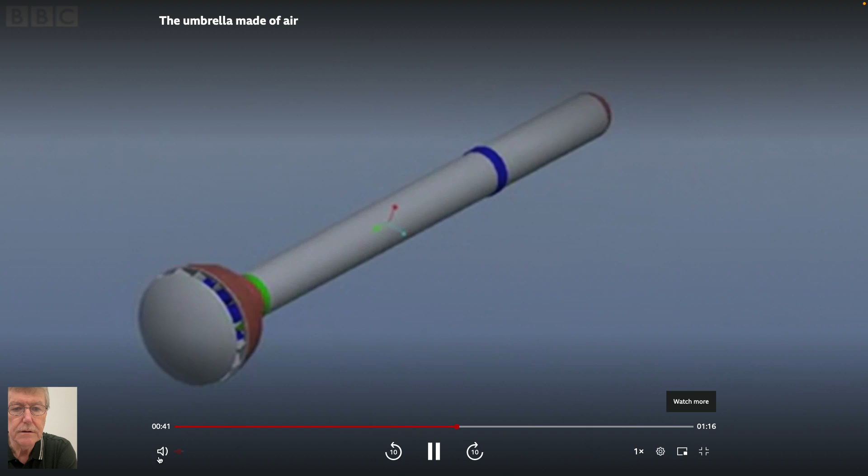An umbrella that doesn't rely on traditional materials to keep you dry, but instead creates a force of air so strong it actually deflects the rain away from the area above you.

Well, I've never seen one of those umbrellas actually in use. That's kind of cool. I guess it's a bit antisocial because it probably blows all the water on someone else.

And so, what else have we got? Oh yes, bit of death.

Northern California, a giant fireball there last night, just around dinner time. Dozens of homes destroyed after a huge explosion last night. It was apparently caused by a broken gas line. It happened in a San Francisco suburb very close to San Francisco International Airport.

The firefighters are still working to make sure all the smoldering flames are out completely. We're seeing little pockets of flames still pop up here after a raging inferno around dinner time Thursday evening. Flames roared some 60 feet into the air as block after block in this residential neighborhood, about 5 miles from San Francisco's airport, were engulfed. Witnesses reported hearing and feeling a large explosion, leading to early speculation that a plane may have gone down. It sounded like a jet, almost like just a giant roar, and then the biggest boom I've ever heard in my life. But it was a hot...

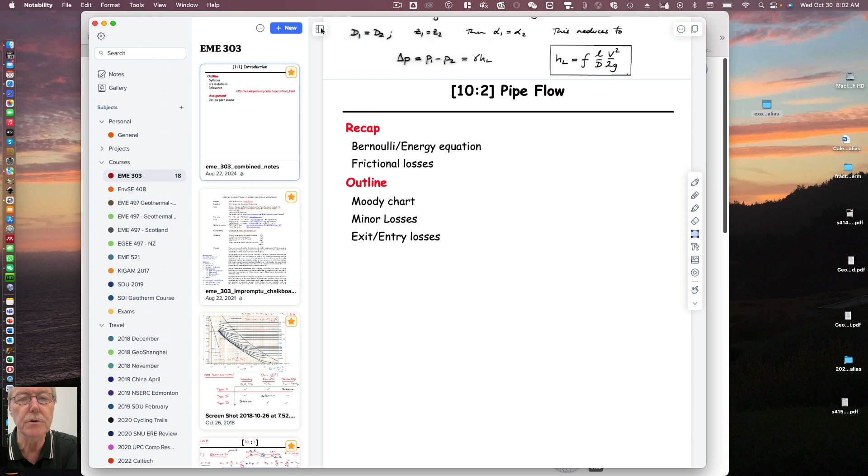So anyway, that kind of brings us up to pipelines. We tend to think about pipes in our house, but of course pipelines are used for all kinds of things. Well bores for getting water out of the ground, and for getting natural gas and hydrocarbons out of the ground are also pipes of some nature as well. So that's what we're busying ourselves with now.

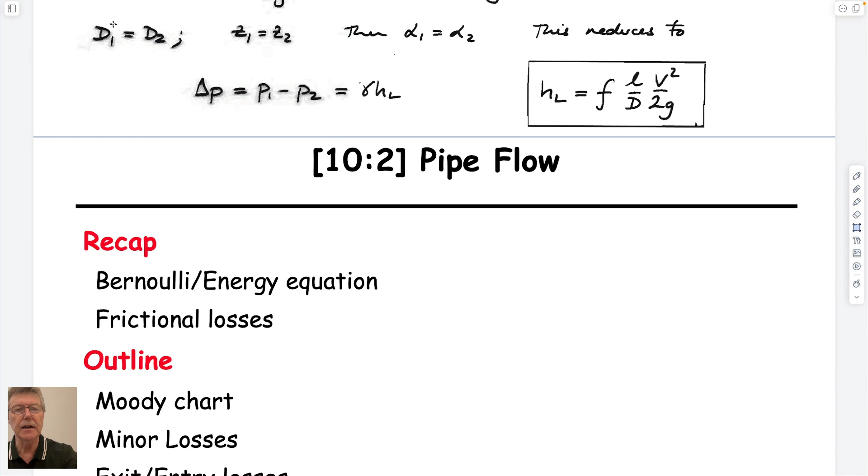So what did we talk about last time? We tried to motivate the idea, I'll go back maybe to drawing things again today. We made the point yesterday of kind of what we've come through. We talked about Bernoulli, and we've talked about the energy equation, and the only difference between them is that if we use the energy equation, it allows us to realistically accommodate losses in our system.

So I'll get back to drawing things. And we talked last time about how we can characterize these flow systems. I guess we could do it in terms of what we know about this. This is just a simple geometry that we have.

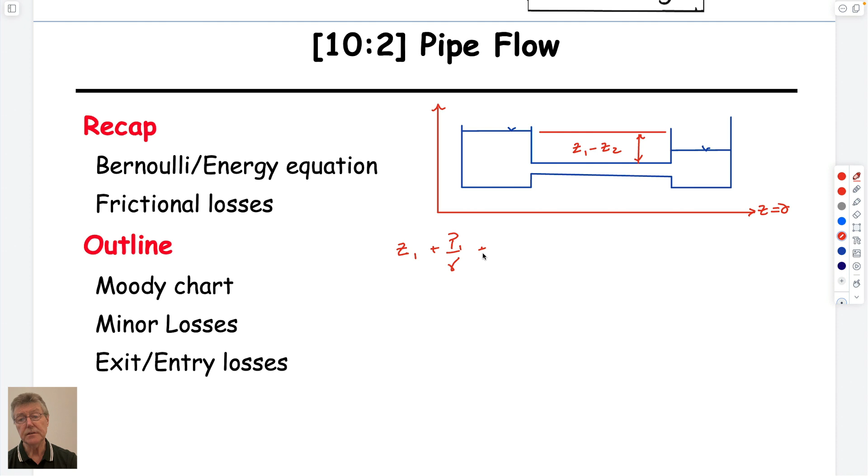Relative to our datum, z equals 0 here, and z going upwards. And we've talked about Bernoulli. This would be z1 minus z2, delta z. So you'll remember that our Bernoulli equation is elevation plus pressure head plus velocity head plus pump head, and that is equal to the converse on the other side, which you also know, probably don't have to say.

And added to these are two other terms: the sum of head losses plus the sum of head losses. And these we'll call major, and these we'll call minor. So if we remind ourselves of this, you know all these features, I think. This always has to be upstream, and correspondingly, this has to be downstream.

Pump head we define as equal to the power output, we'll call W dot, divided by density times flow rate times G, gravity. I guess we've also called it other things, such as Q rho is the mass flow rate, right? We called it uppercase M, and G would be one way to write it. We know if it's positive, it's a pump. If it's negative, it's a turbine taking energy out of the system. So that's our sign convention for these.

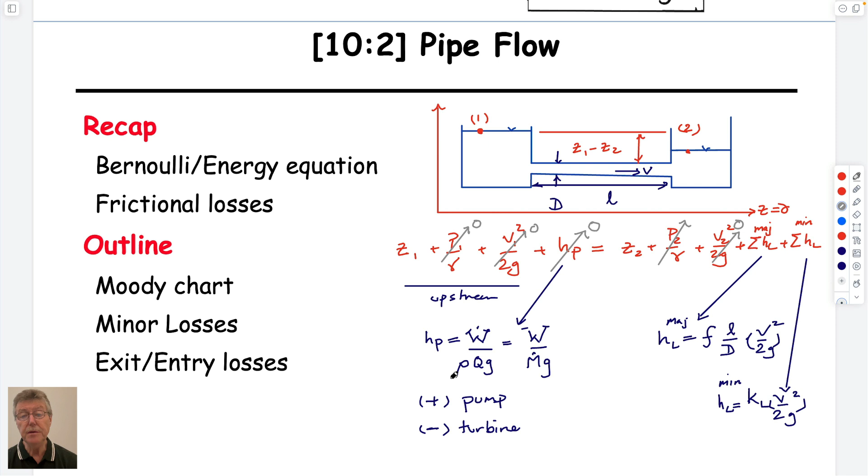So you'd be left with just an expression here that you want to solve, which would be Z1 minus Z2 is equal to HL, and there's only one HL, so it's equal to the friction factor times the length over diameter times V squared over 2G. V squared wouldn't be 0 because of the velocity in the pipe.

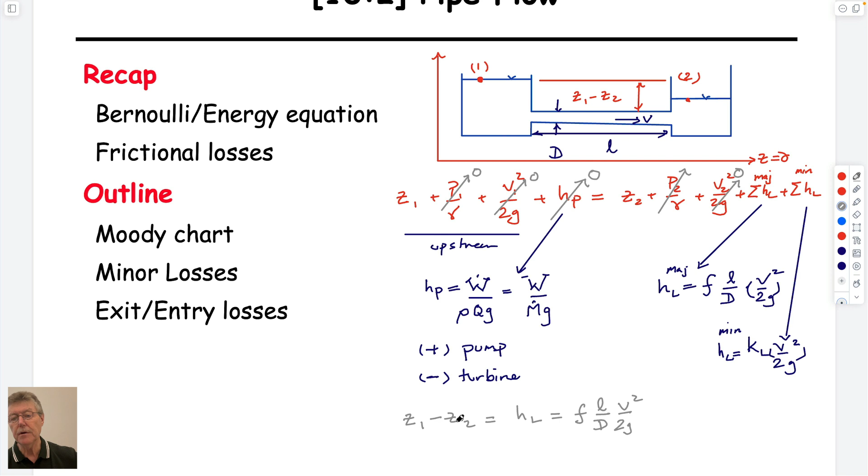Notably, you could see that if this was Bernoulli and there was no head losses in the system, you couldn't sustain this, right? Because it would give you Z1 minus Z2 is equal to 0, and that's not true. So the whole essence of this problem is the frictional losses you incur in the pipe.

The alternative way to do it, that would be one way to do it. A second way to do it would be to write it with points, instead of points 1 and 2, maybe with points 3 and 4. And 3 and 4 could be here.

And I guess if that's the case, I can erase these straightforwardly. This would no longer be 0. This would no longer be 0. But this would, because they're on the same elevation, right? It's not 0, but they cancel out. 3 and 4 are on the same elevation, so we lose these.

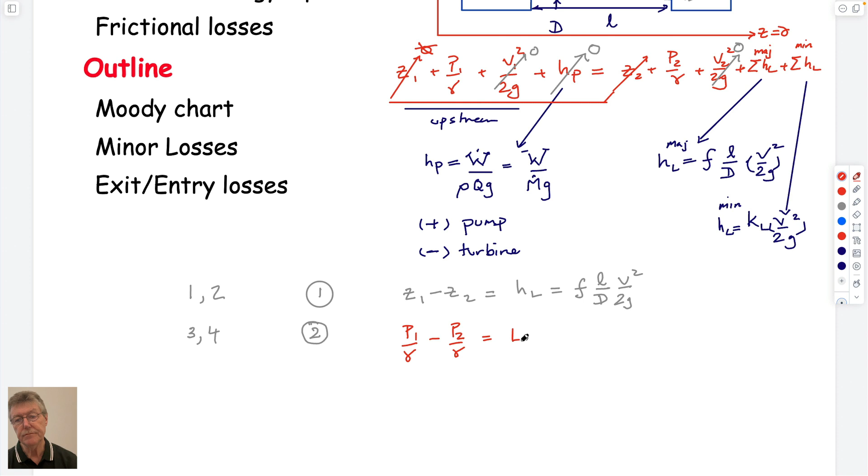I guess in our way of drawing it, I'd have done it like this, right? Not 0. They're equal to each other. And so if that's the case, then we have P1 over gamma minus P2 over gamma is equal to HL.

And of course, the pressure here is just going to be equal to whatever this height would be. Well, the upstream pressure is going to be this, which is just P3. And so P3 is equal to H, I don't want to call it Z, right, is H3 gamma W.

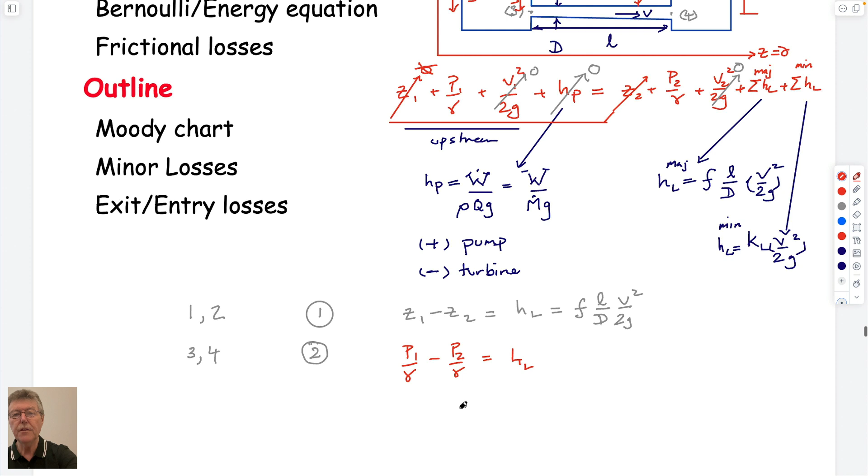So either way we do it, the velocities cancel out if the pipe is the same diameter along its length. And so we just need to figure out exactly how to work out these characteristics.

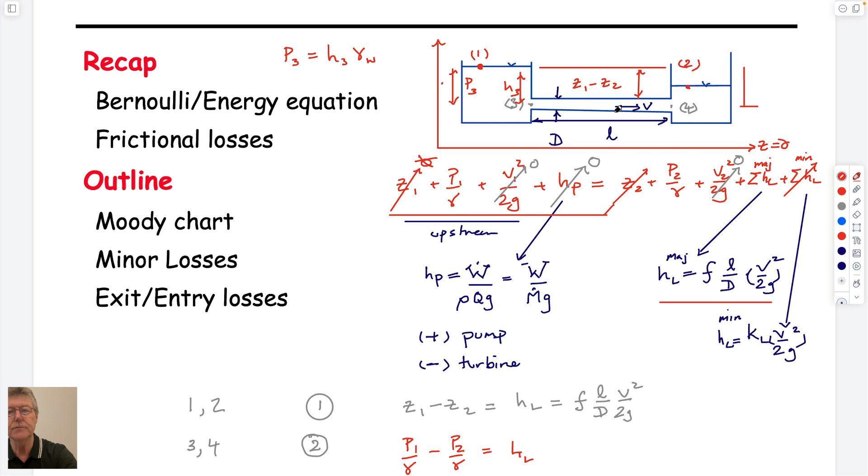For equation 1, how come we don't include the minor losses? Can't, because I don't want to. Let's not complicate matters. They're minor, so we don't want to. So for what we'll do today, we'll concentrate on minor losses maybe next time, but we'll talk about, these are probably the major components of losses, hence they're small incrementally, but they're major because they act over long length. So just forget about it for now.

And so what we could do is we can then hark back to what we talked about last time. And so hopefully you've still got 15 hours to look at 9.3. But remember last time we used Buckingham pi.

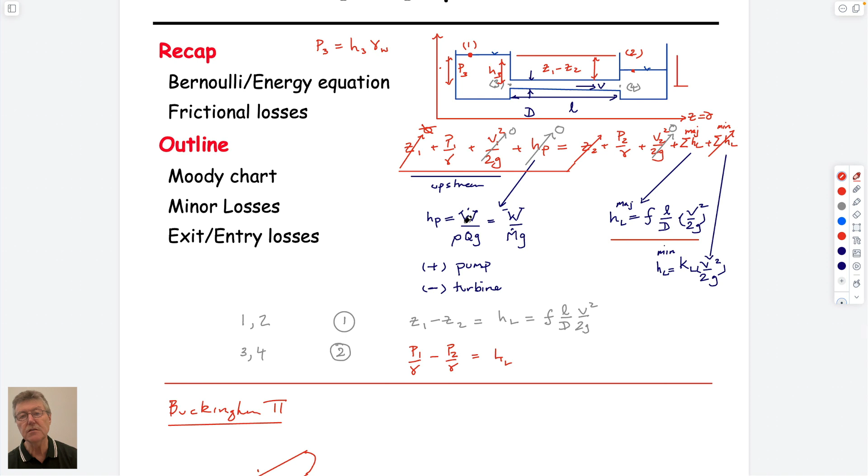We described our system in terms of flow in a pipe, which is what we're doing. I guess I'm making the point that we could pull this pipe out on its own, just like this, and we could just look at the pressures upstream and downstream.

So this would be what we call dP, I guess, on Monday. We could look at the length of the pipe. We could look at its diameter. We could look at the fact that fluid is coming out of it at some average velocity.

I'm not sure we made the point last time, but if we looked at a section across this, the actual flow section will look like this in terms of velocities. But what we typically do is we take this and we transform it to be a uniform velocity, that is this. And so in that particular case, the area under the curve on this parabolic distribution is equal to this.

So this is the velocity. I suppose this is velocity as a function of radius. This is also. But this velocity here is just an average velocity. So what else did we say? We said that we would have the density of a fluid, we'd have a viscosity of a fluid, we'd have a velocity, I think that was it.

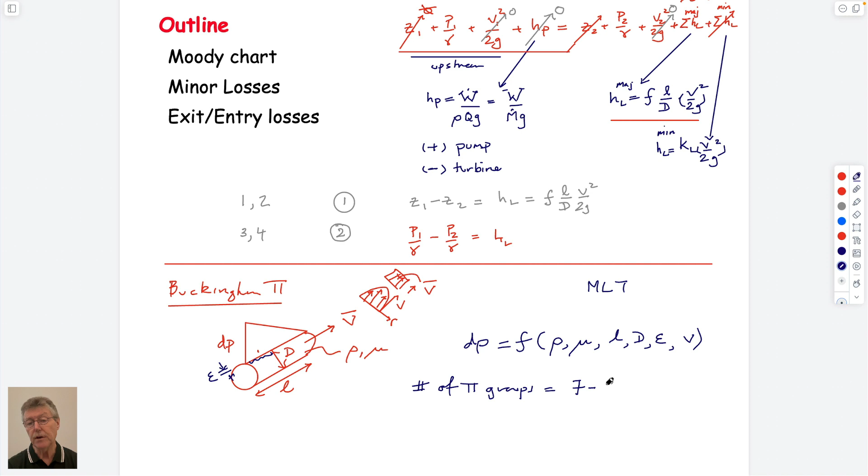So there are 1, 2, 3, 4, 5, 6, 7 terms here. From Buckingham pi, we know that the number of pi groups equals the total number of terms, 7, minus the total number of MLT—mass, length, and time—represented. So certainly mass is represented here, as is length. Time is represented in velocity. So we have all three.

So 7 minus 3 is equal to 4. And we said last time that we could describe this behavior in terms of 4 dimensionless groups. We can take care of 3 of them by noting that these are all in dimensions of length, and so we could just combine 2 of these as Buckingham pi groups. You'll always get dimensionless groups, but you don't necessarily get the ones you want that guarantee you can use them usefully. So it helps to know what those are in advance.

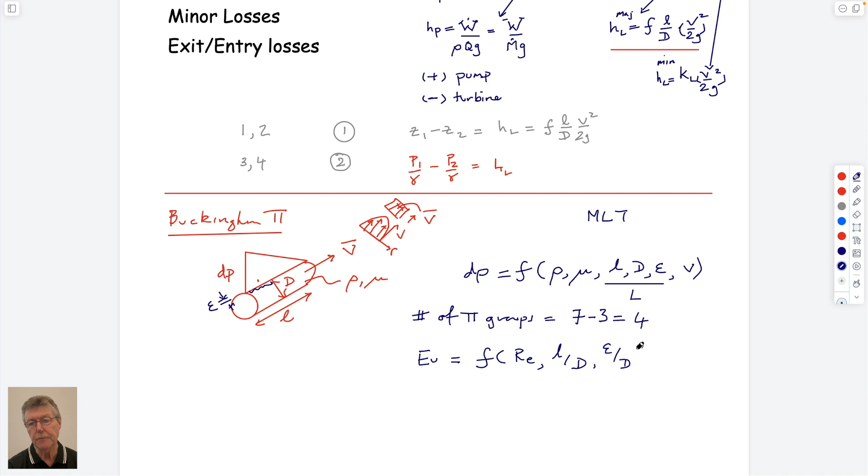So if we use these, we end up with dimensionless groups, and that is that an Euler number is equal to some function of a Reynolds number, length over diameter, and roughness over diameter. So we know there are 4 groups. We can combine them in some way, and if we did it in a smart way, we'd end up with this.

If we want to write this out in longhand, we'd end up with an Euler number, which is a pressure—which we've called change in pressure—divided by rho v squared. Remember, with dimensional analysis, geometric similitude, the model has to look like the plane when it's shrunk down. Kinematic similitude has to satisfy the Reynolds number, and the Reynolds number is going to be something like a velocity, a density, a characteristic dimension, and a viscosity.

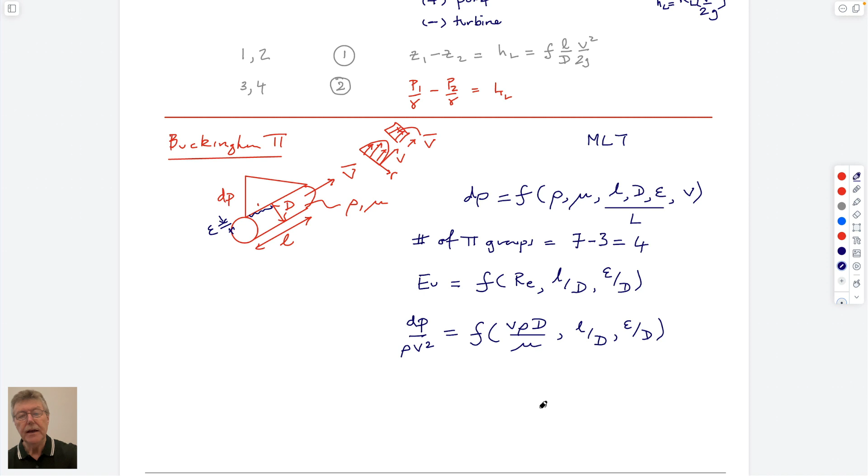And these 2 other terms, L over D and relative roughness. So what we could do is, if we think these relate to each other, take a pipe that has a given length and diameter, and let's say the roughness is 0, then we could do an experiment on that pipe. And if we then plotted from that experiment these 2 remaining variables, the pipe doesn't change, the roughness doesn't change—it's just a single pipe.

And so we do an experiment flowing fluid along here under a particular pressure gradient between upstream and downstream, and we measure the velocity, the average velocity. So if we did that, we could plot pressure over rho v squared, which is the Euler number, against the Reynolds number, which is the velocity, the density, the diameter of the pipe, and the viscosity of the fluid. If we're only using one fluid, then the densities and viscosities will be the same.

And so if we do that at a given pressure, we'd get a velocity. So pressure dP1 gives us V1. And that would give us a point which we could plot on this graph, which would be this. Very simply, we get this.

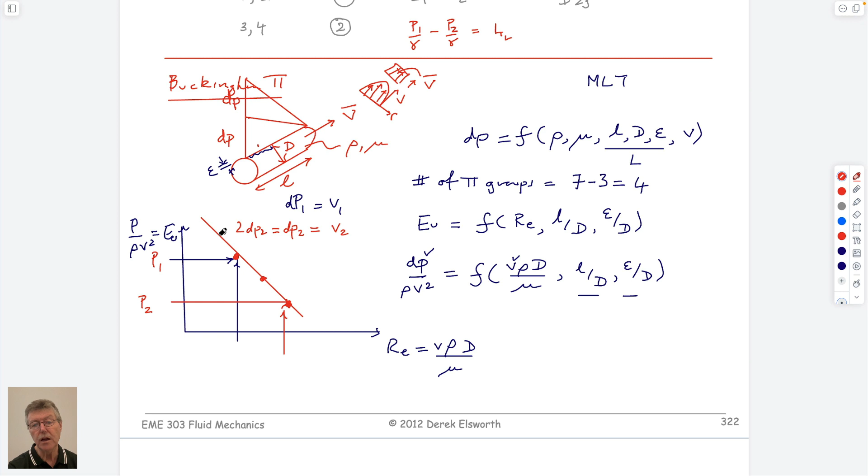But if you've doubled the pressure, then this number would have increased, and so you'd have a point that would be here. And so now, if you want to do other experiments, you'd expect all those other experiments to just go on those lines if you change the pressure. If you increase the pressure some more, maybe you'd be down here, and you've got a relationship. And so this starts to look like the behavior that we'd expect.

And so we can characterize the behavior in terms of this. And actually, this is exactly what we expect to see. The so-called Moody chart is that this curve here is just from doing the experiment at one pressure drop, doubling the pressure drop, tripling the pressure drop, and you just move down.

So without knowing anything about your system, for a particular pipe in a particular flow regime, low enough Reynolds number, you can get that experimentally. You could also come back here and keep on doing that. So you could do it at P4 is equal to 4 dP1, say.

And you might expect that this keeps on going, but actually what you'd find is that it starts scooting over here. So it'll come down here, and you get a change in behavior. And you see that in the Moody curves that we just looked at. So if you keep on doing it to get P3 and P4, then you don't get this linear relationship anymore.

You don't know that yet, but we'll explore why that might be. But you come along this, and this occurs at a break in the behavior. And typically this is at a Reynolds number of something like 2,200, of that order.

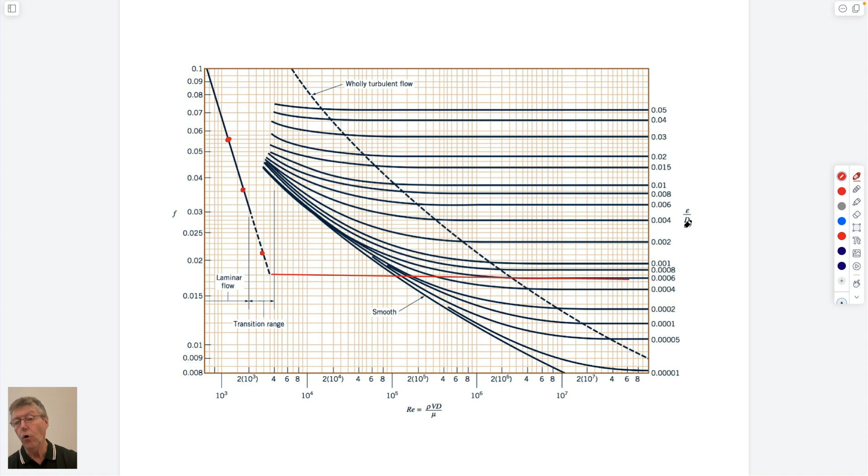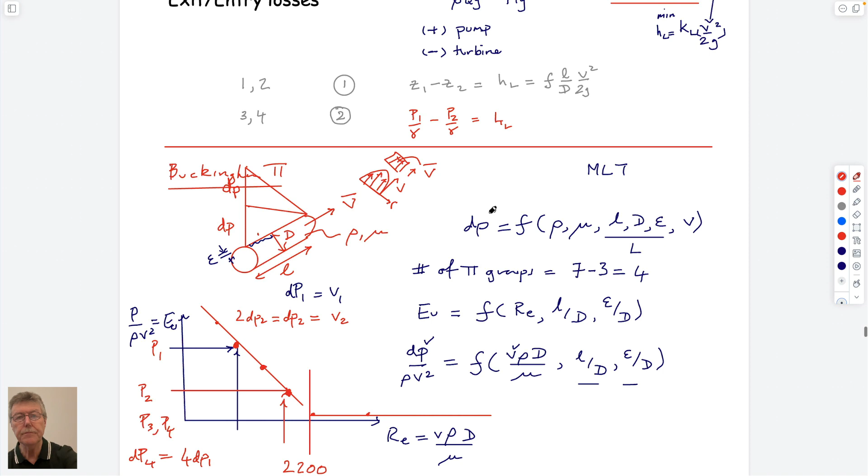And you see that now this Euler number, which is this thing here, the Euler number is also what we call this friction factor. You realize that this number here, this friction factor, is actually our Euler number.

It's the amount of pressure that's eaten up in pushing fluid along a pipe. So if you're pushing fluid along a pipe, it starts off at high pressure here, comes out at low pressure. So this pressure is eaten up, in this case, because there's a drag along the sides of the pipe. It's just a shear force due to the viscosity.

If it's a closed pipe and the fluid's hitting the wall and going around it, it's just the same thing. Pressure is high on the front end of the pipe, it's low on the back, and so there's a net force on the pipe. It's just from flow around the pipe in that particular case. But it's the same basic relationship.

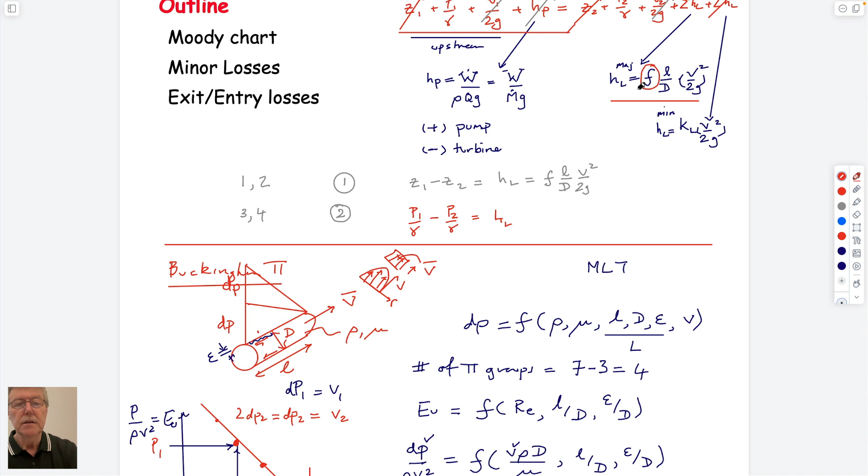And so that's the kind of behavior we have. So we'd like to be able to understand a little bit about how we get these relationships. So the other thing we could do, this all experimentally, which is what we've done here, or we could be a bit more flash about it, and we could do it analytically, I suppose.

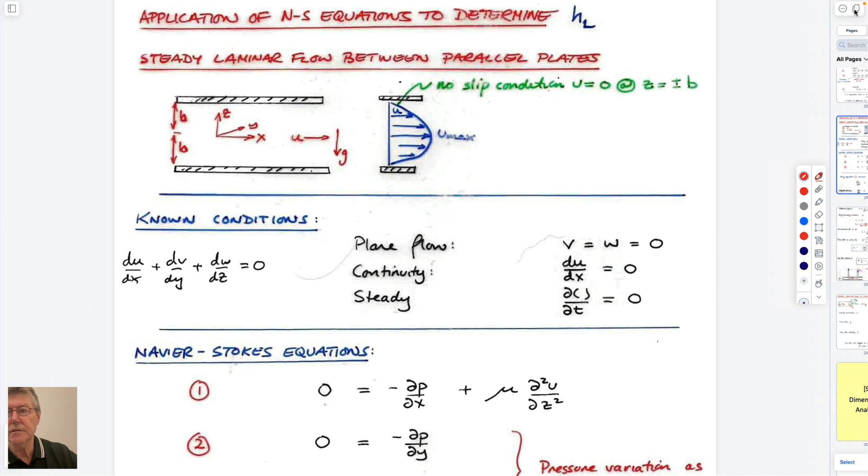And if I go back to something I think you've seen already, I need to keep the pen away from this. So in week 8, it should be right here. I don't know how much time we spent doing this, but can't remember whether we talked about this this year or not.

You'll remember, also relevant to this course, but not really examinable material, that we had conservation of mass, which we wrote as being, in this particular case, sum of mass flow rates are equal to 0 if we ignore the other terms.

And we have conservation of momentum, I'll write it in shorthand, mv. You'll remember that was a velocity multiplied by a mass flow rate. You used it on your test last Friday, is equal to a force. You'll remember that these are velocity as a vector, so there are 3 equations here.

One in x, one in y, and one in z, and just one for this. If you take each of these equations for a control volume, and write those equations for a control volume that is a little differential element in our coordinate system, so x, y, and z.

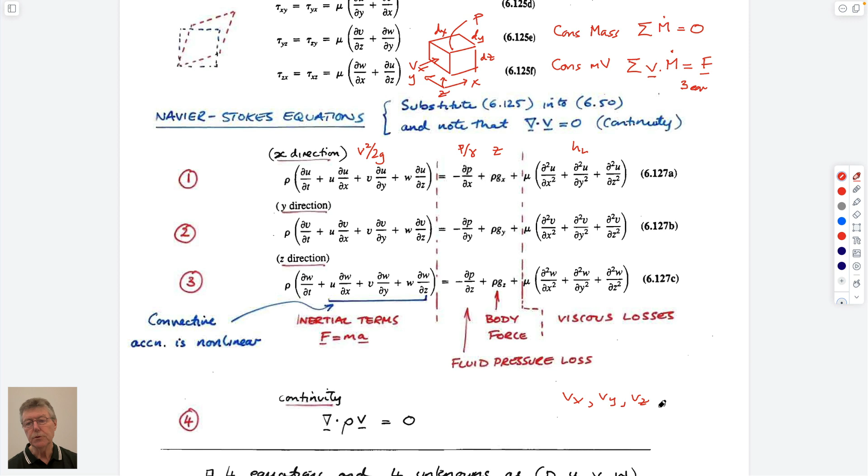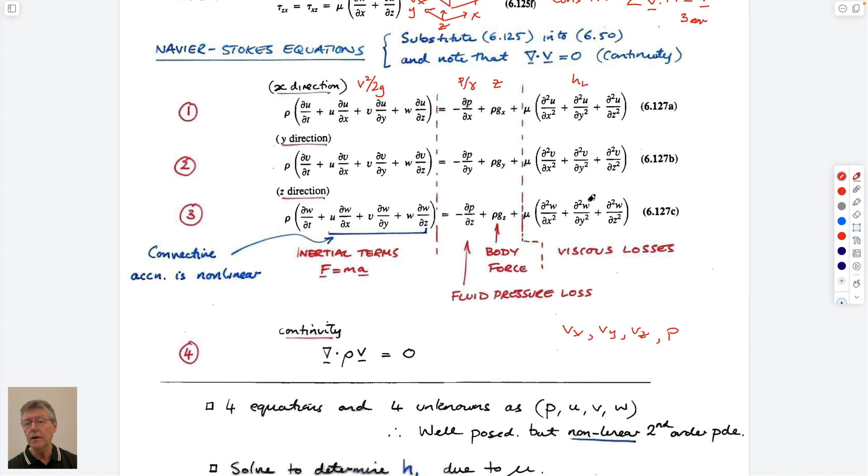So if we want to solve a flow system that involves these, we have to have a total of 4 equations to solve them. So we have 3 conservation of momentum equations and a conservation of mass equation. This is just a different way of writing it.

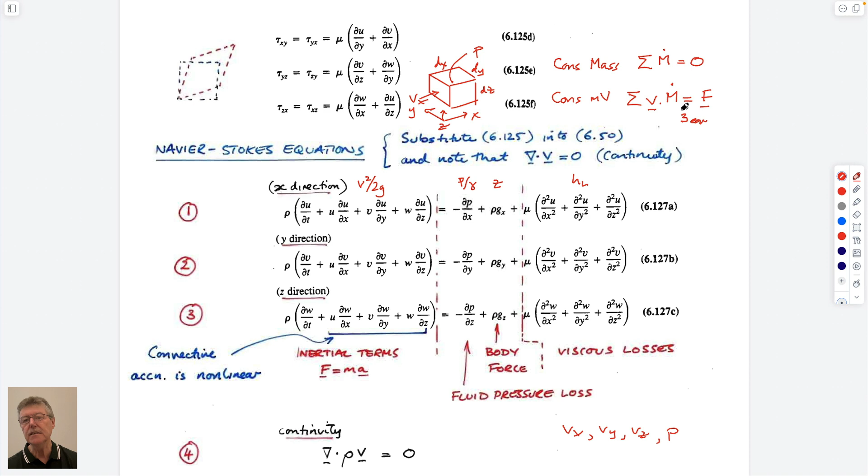So it's basically these equations. This equation, of course, has to have a head loss term in it, so it's not really conservation of momentum. It's actually the conservation of energy term, which we dealt with in week 8, but it's very similar. And so we can solve these equations.

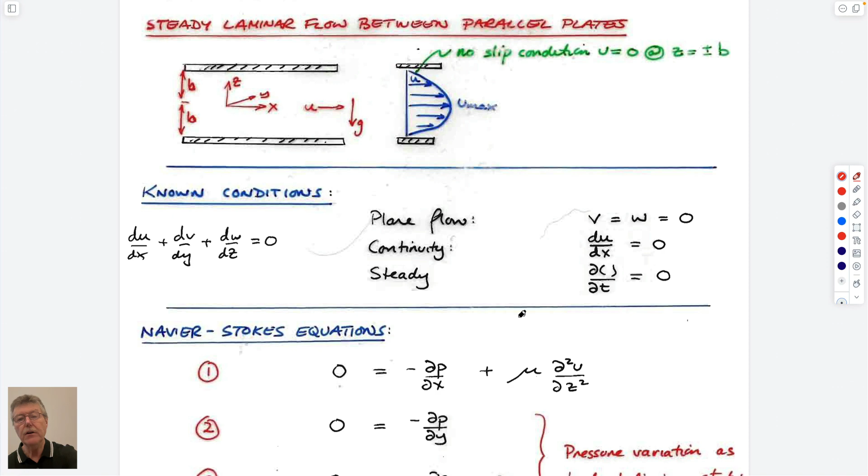If you solve these equations for some seemingly esoteric problems like flow between 2 parallel plates, which is like flow in a duct, you get a distribution of the pressure across the duct and a very simple relationship. I won't go through the derivation, but it says that the average flow velocity is equal to 2 times the half thickness of the duct squared, times the pressure drop, divided by 12 times the viscosity.

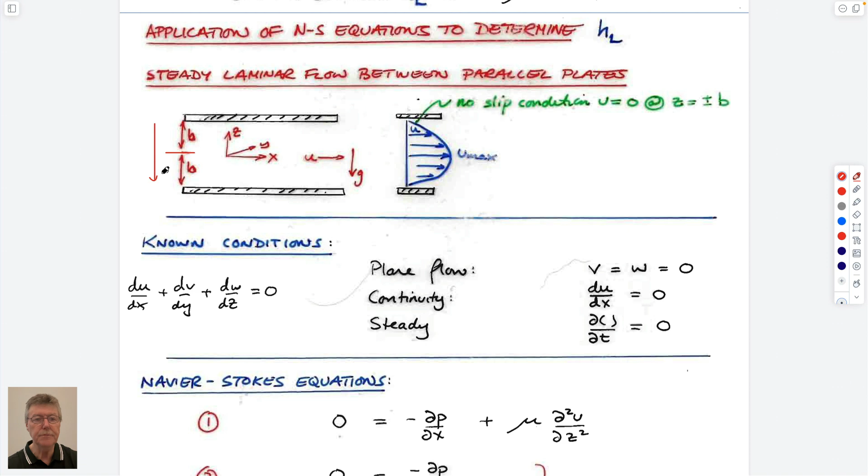And so the geometry of this is given here, so that this is the duct. This is the width across it, and you get the average velocity coming out of this.

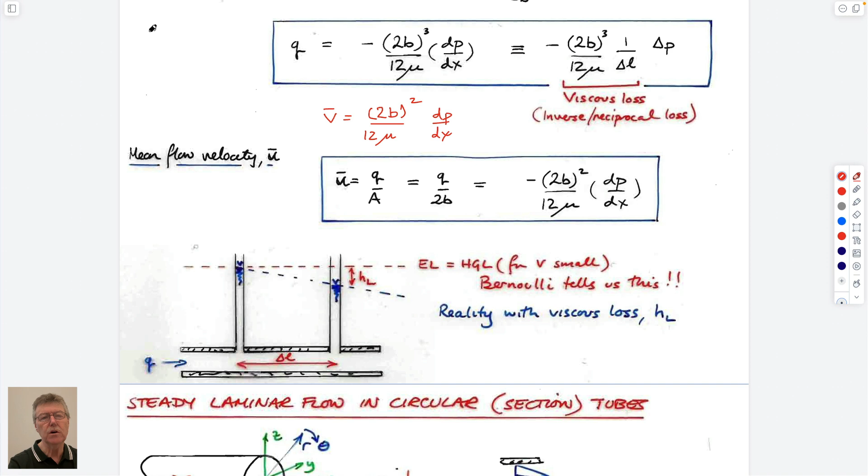It's not completely esoteric. If you're petroleum engineers or environmental systems engineers and you know what Darcy's law is, it gives the flow velocity in a porous medium as a function of a permeability, a viscosity, and a pressure gradient.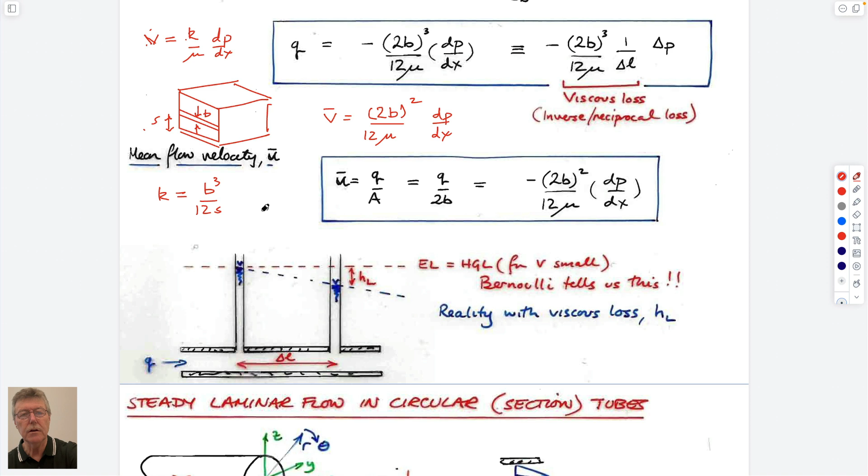So not completely esoteric. You could use this to calculate permeability of a gas shale reservoir or a fractured reservoir that you're containing your radioactive wastes in.

Likewise, you can use those equations to get magnitudes for flow within a pipe. And the solution for that is this. And again, I'll just write it out. Perhaps I'll write it out here. So in other words, the velocity is equal to this term here.

I'll write it out as the diameter of the pipe squared over 32 times viscosity times the pressure gradient.

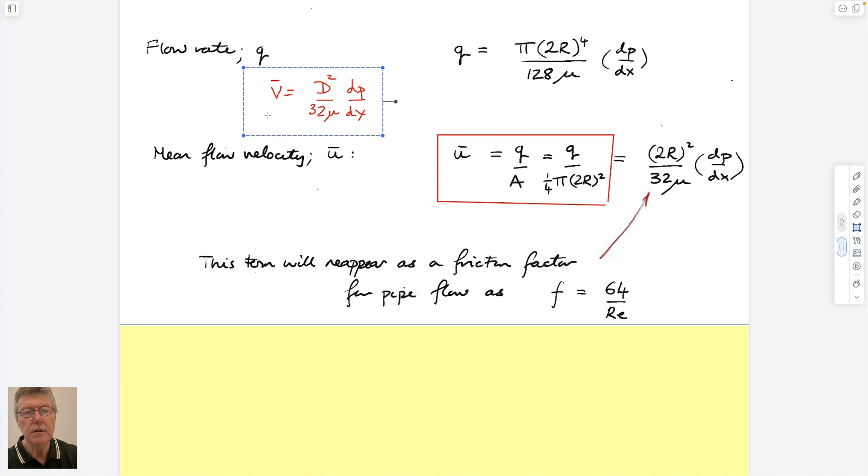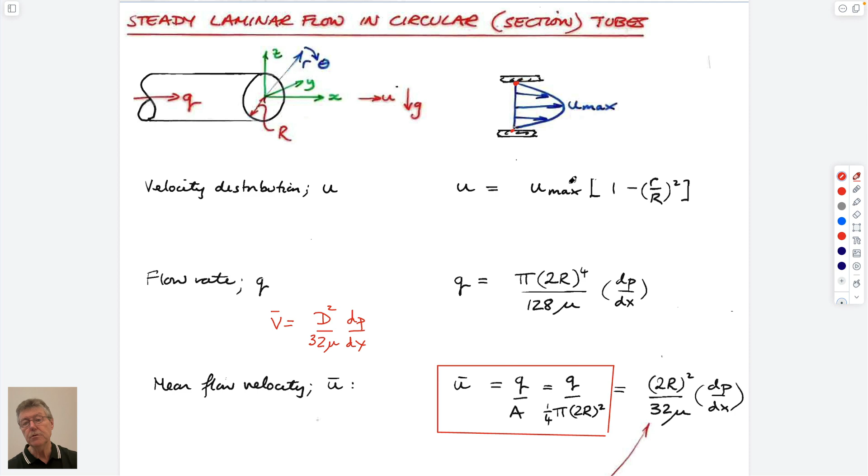And so that merely represents flow within this pipe. We have a velocity profile across the width of the pipe. You'll notice it's anchored at 0 velocity at the walls of the pipe, maximum in the middle. It's actually a parabolic distribution. This is the distribution.

But as I said before, we're interested in the average velocity. So if you take the area of that pipe and reduce it so the areas of these two shapes are the same, then this would be the average velocity here. This is the actual local velocity, it changes across the radius. And this would be the radius. We already drew this.

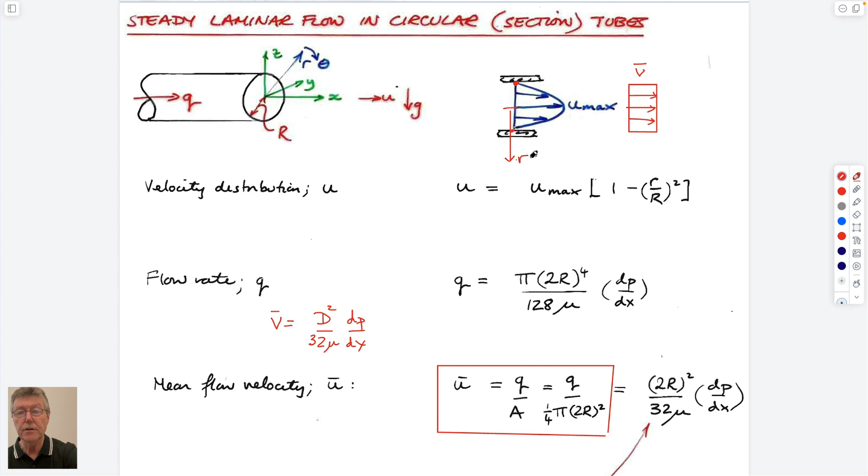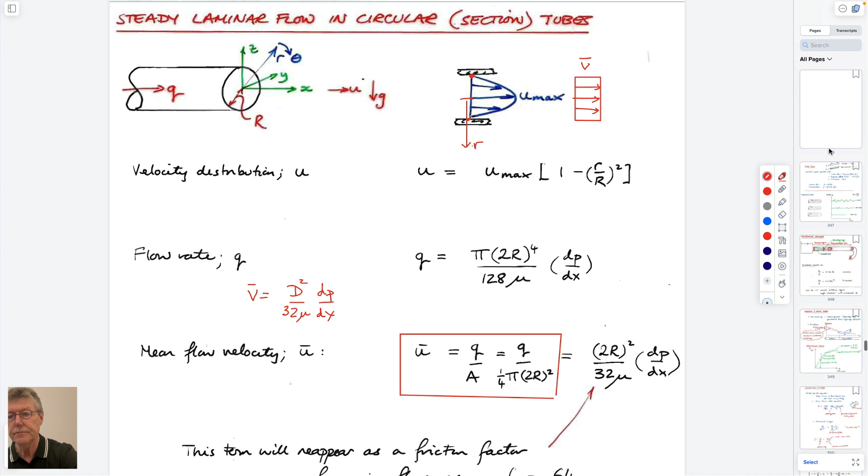Again, I'm getting bogged down in a bit of a rat hole here, but it's fine. Humor me for the moment. So I tried to get back where we were. Bless you. This is probably where we are here. So we're talking about pipes. Let's see if this still works. It might have forgotten already. No, it didn't. Excellent.

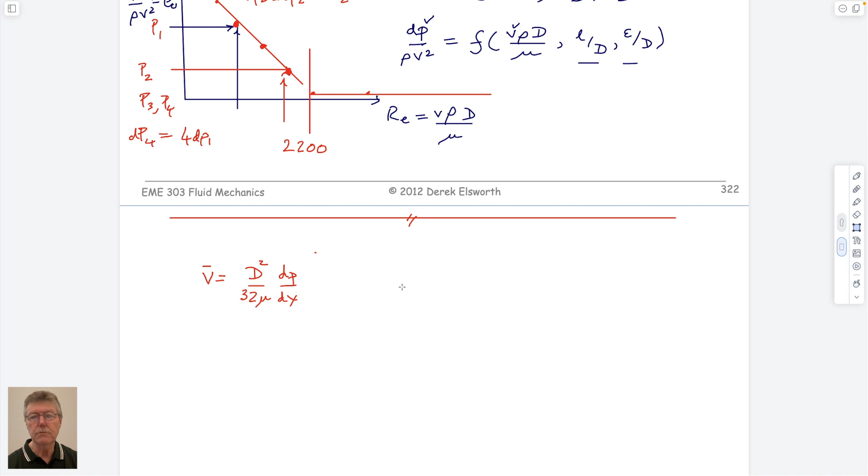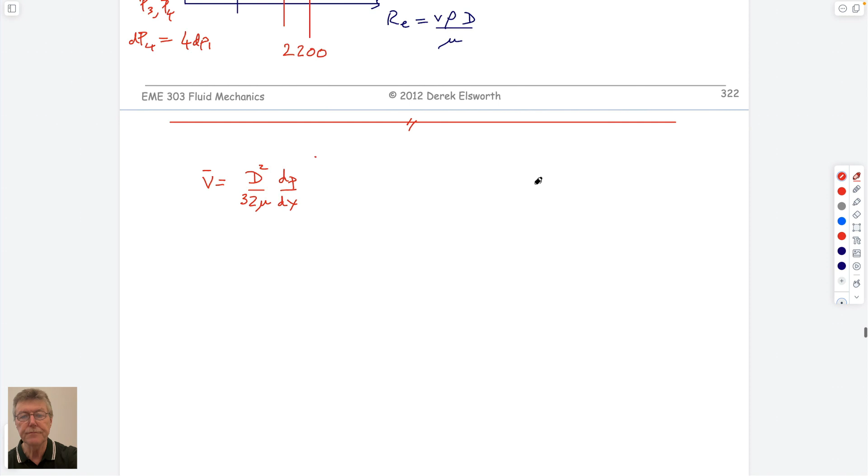Okay, so we want to represent this. What we'd like to do is figure out whether we can get an actual parameter—that's a bad choice of term, isn't it—this should be function of, not that term. Function of. We'd like to figure out exactly what this friction factor is for a pipe. So what am I going to do? This is the average velocity, which is given by that. And so I could write this also for our geometry here.

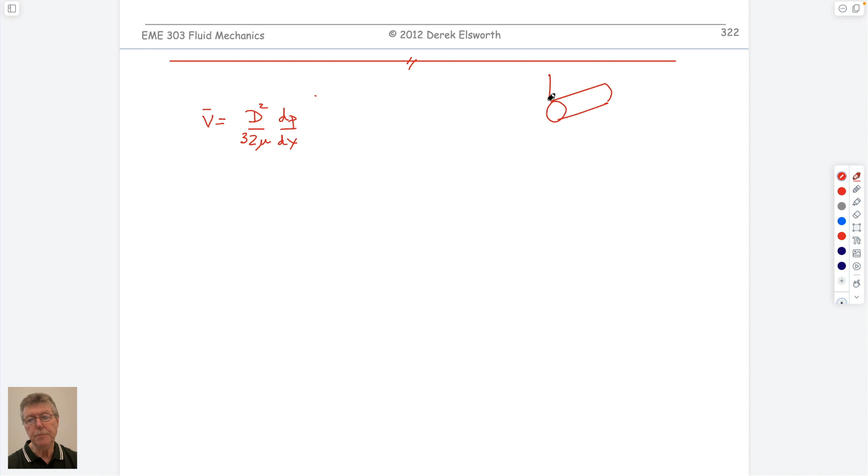This is dP over L, same geometry as before. This is L. So we could write average velocity as equal to diameter of the pipe squared over 32 times the viscosity times the pressure drop, over the length over which it drops, which is L.

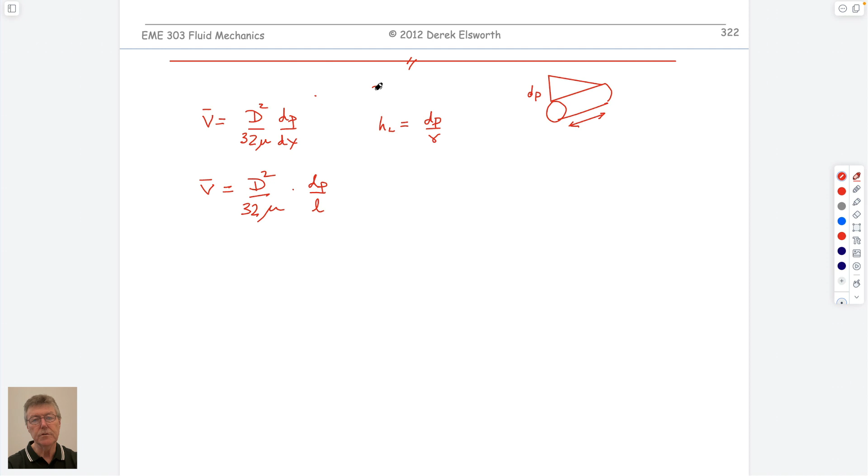And so that is equal to, we know that head loss is equal to dP over gamma, right? In other words, dP is equal to head loss times gamma, just from the relationship. And so we could define this here as that.

And so this would be that the velocity is equal to d squared over 32 mu, head loss times rho g, just to write these terms out, divided by length. And so if I wanted to write that in terms of head loss, I could write head loss is equal to velocity times 32 times viscosity over d squared, times length over rho g.

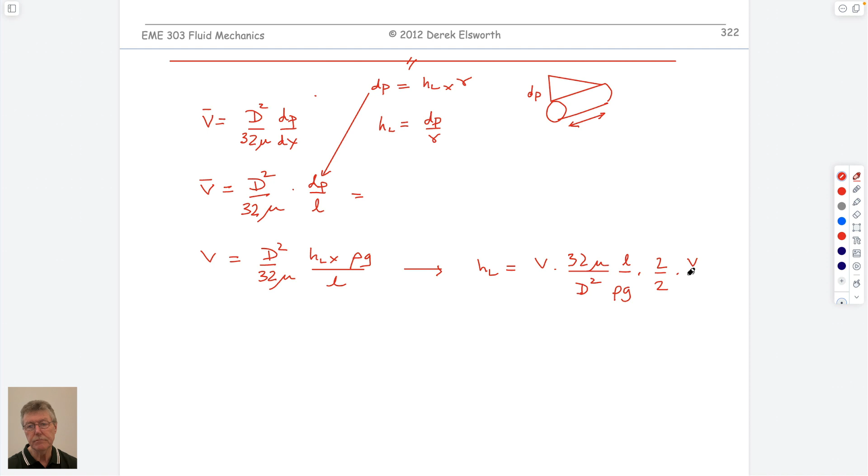And I think I want to multiply that by 2 over 2 and v over v, right? This is just 1. And the reason I want to do that is because now I want to split it up into terms that mean something to us. So if I take this and multiply by this, this is 64.

This is 64. This is L over D. This is V squared. So this and this... did I lose a P somewhere? No, I got rid of it. This is V squared over 2G.

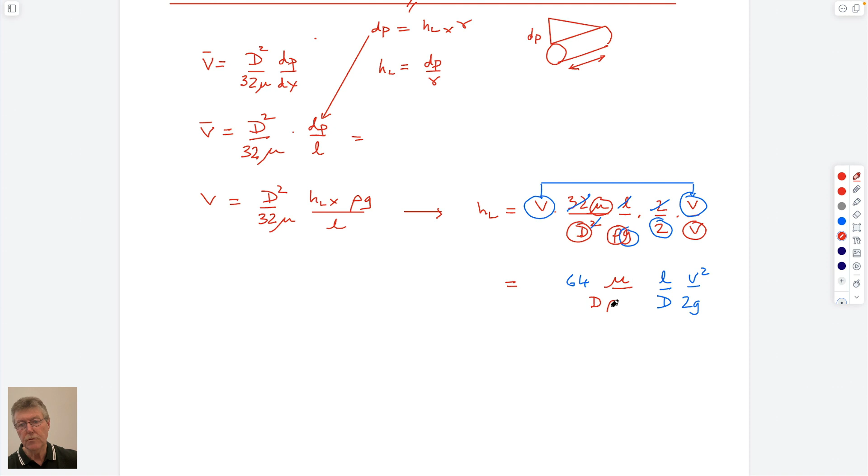And I'm left with, if I use a different color, mu over d rho v. So what we've got exactly here is that this is equal to 64. This term here is Reynolds number, but 1 over. And this is length over diameter. And this is v squared over 2g.

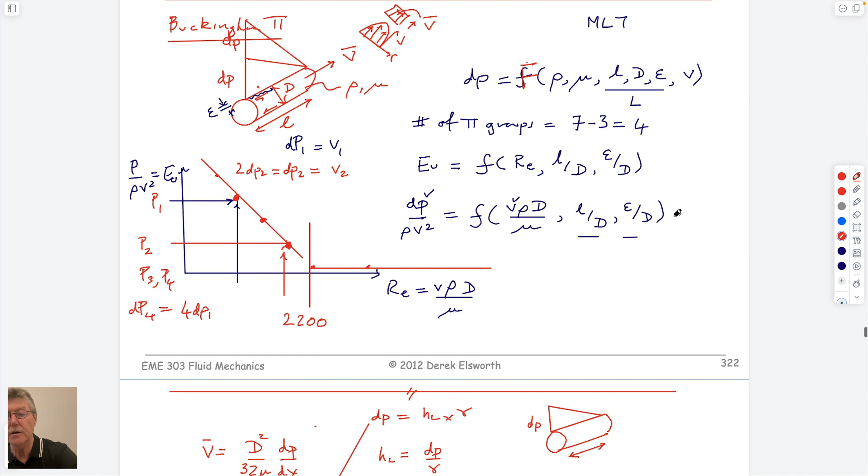So in terms of how we defined this before, I did actually get it out. This is friction factor. This is length over diameter. And this is v squared over 2g. So if you remember, we came into class today just throwing this out, not really explaining where it came from. But that's where it comes from.

And so this is for laminar flow. What we mean by that is that the flow profile across the width of the pipe is this parabolic flow. No vortices, no eddies, but this particular distribution which gives us this. And so this is useful because this friction factor, F, is just equal to 64 over Reynolds number.

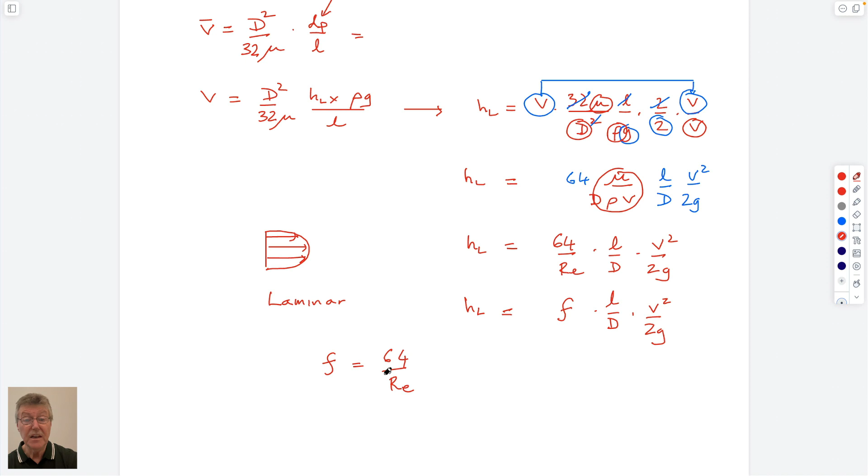And we also said that this friction factor, or perhaps I didn't, is also equal to Eu. And so if we go back to this, this is also equal to our friction factor. So I'm just trying to make sense of where all this comes from. You don't need to know those derivations, but it's perhaps useful to understand where it comes from. So we could do experiments, and Buckingham Pi allows us to choose groupings of variables that allow us to do the minimum number of experiments.

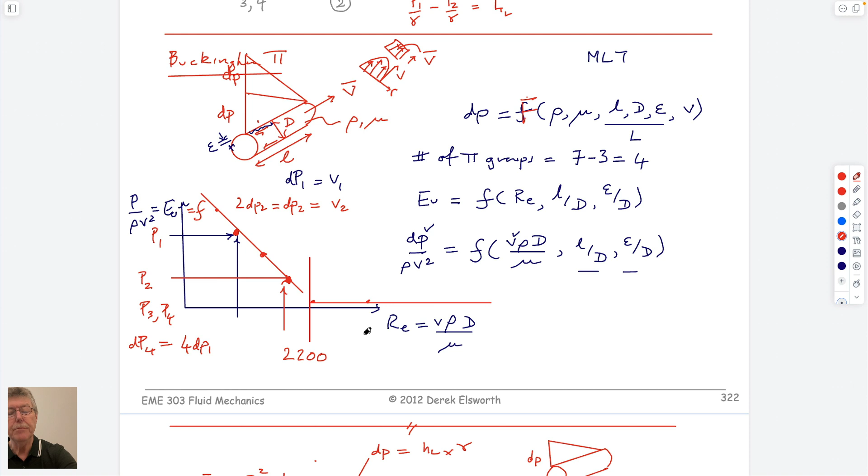So we just do them with a single pipe and change the pressure, and we know that's fine. We could also exchange the pipe out for one that has different roughnesses, and we'd get different behaviors, and construct it. But for simple flow behaviors, and this is the simplest, laminar behavior, we can actually get a closed form solution, which is this here, by solving the Navier-Stokes equations.

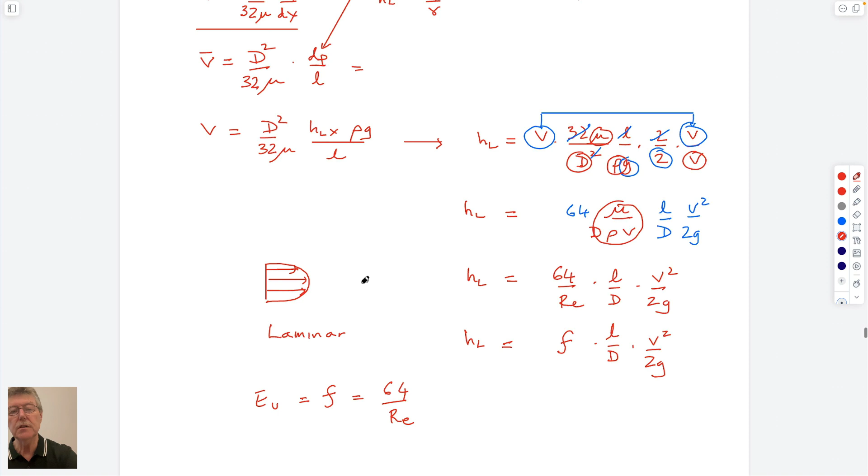It's a bit involved, so we'll just pluck out the final result, the standard result, and use it. But if we use this standard result, then we get this expression here. And so this term here is the friction factor, which is equal to 64 over RE. And so the equation of this line is just 64 over RE.

And so the way in which we'll want to use this is that we will presumably be writing that the head loss is equal to a friction factor multiplied by a length over diameter multiplied by v squared over 2g. The simplest exposition of this HL is on this diagram here.

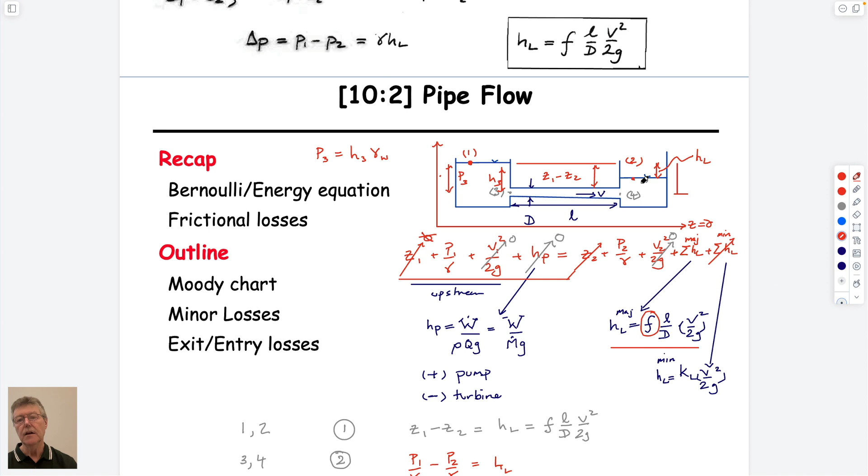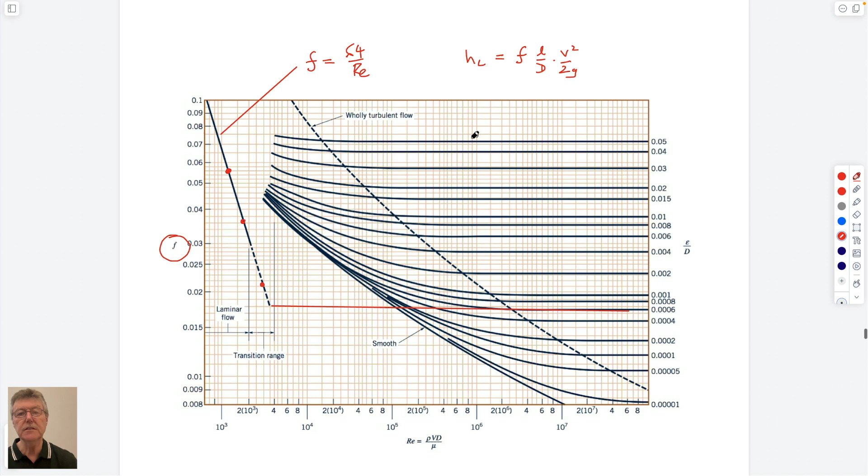This is HL, right? If it's Bernoulli, if there's no frictional losses in the system, we can't write that Z1 minus Z2 is equal to HL, because HL is equal to 0 in Bernoulli, and Z1 and Z2 aren't the same. So it can't have two different levels if there's no head losses. The very reason it has these two different levels is because there's friction in this pipe that's retarding it, acting against its flow. And so if we come down here, then this is really measured, this is our delta Z in that particular case.

So what we'd want to be able to do, presumably, is this: if we know what the elevation is between upstream and downstream, we could rearrange this equation to get it in terms of V squared. We'd end up with delta Z, which we can measure, multiplied by 2G, multiplied by D over L, and multiplied by 1 over F. That would be equal to V squared.

So if we know what this term is, we know the diameter of the pipe, we know the length of the pipe, and if we know the friction factor, which we think we know, we can get the velocity. But it comes in two different cases, so we have to be aware of that.

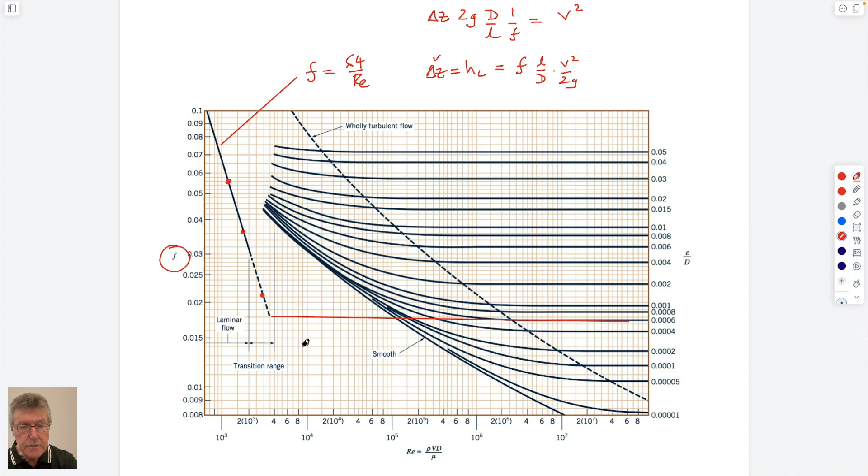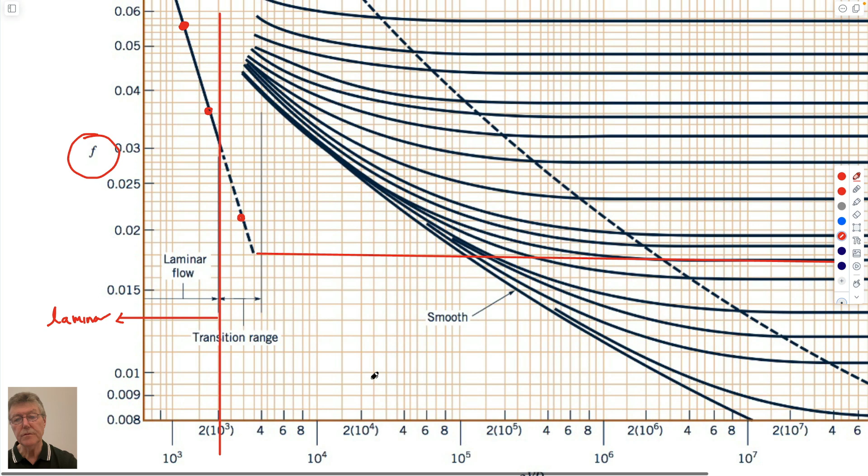The interesting thing for us is that we said at 10 to the 3, so I'm going to make this bigger. We said at 2000, so it's marked on this figure here. This is 10 to the 3, this is 2000, 3000, 4000. So this line here, up through here, this is laminar flow. This is a transition, and it goes to turbulent flow here. This is the transition from laminar to turbulent, and then this is turbulent.

So we end up having two regimes in which we can solve this system of equations. I'm probably stealing my thunder from Friday, but let's do it. We know that we can get the velocity if we know this.

The other thing we note is that in the laminar regime, friction factor is a function of Reynolds number. It could be a function of relative roughness, but it's not. So it's not a function of this.

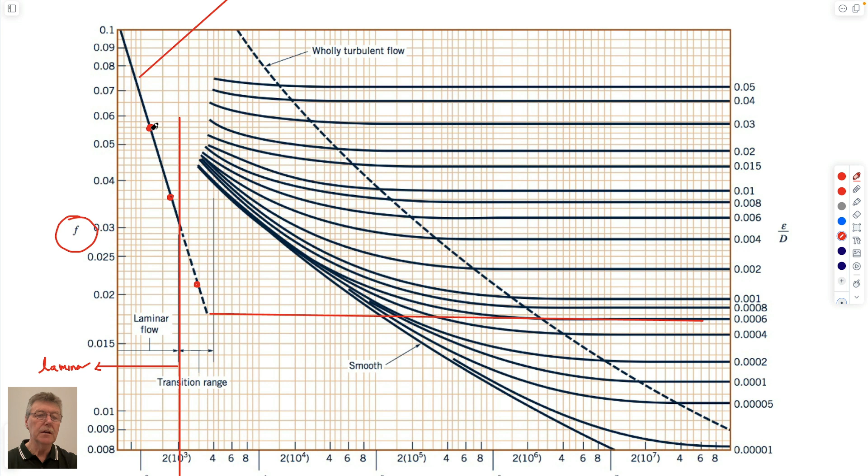And in the turbulent regime, these are the experiments that we've done. You run a pipe, you flow at one pressure drop, a bigger pressure drop, a bigger pressure drop. Somehow you transition over here, and you have a different behavior. Again, the friction factor is a function of those two variables. Friction factor is also equal to our Euler number, but we won't worry about that. It could be a function of Reynolds number, and it could be a function of relative roughness.

We see from this that because these curves are horizontal, it doesn't change with Reynolds number. So if you double the Reynolds number, going from here to here to here, the friction factor, measured off this axis here, is constant. So we know that in the turbulent regime, it doesn't vary with Reynolds number.

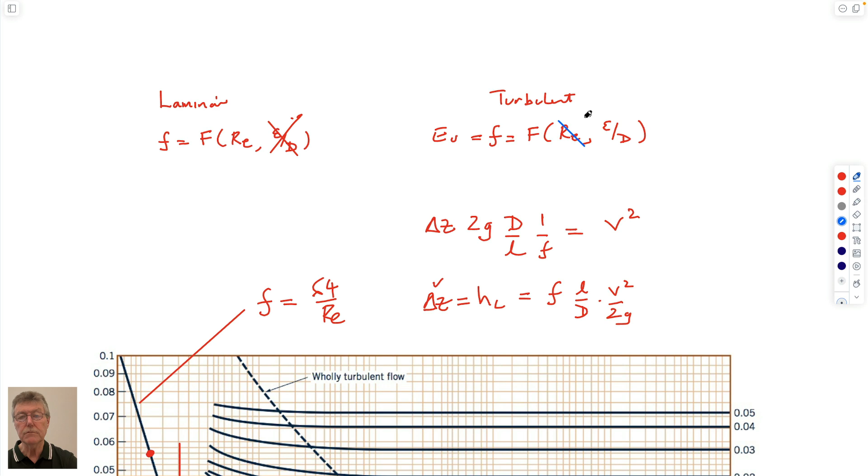But it does vary with relative roughness. If you do this experiment in a pipe which is very smooth, this is the behavior for a very smooth pipe coming down here. So this would be epsilon over d equals 0, no roughness—this bounding curve here that comes down. If you have a roughness of 0.00005, or a roughness of 0.05, these are all the different roughnesses. So with different roughnesses, the friction factor you might expect grows—rougher, more resistance to flow, and therefore a bigger friction factor.

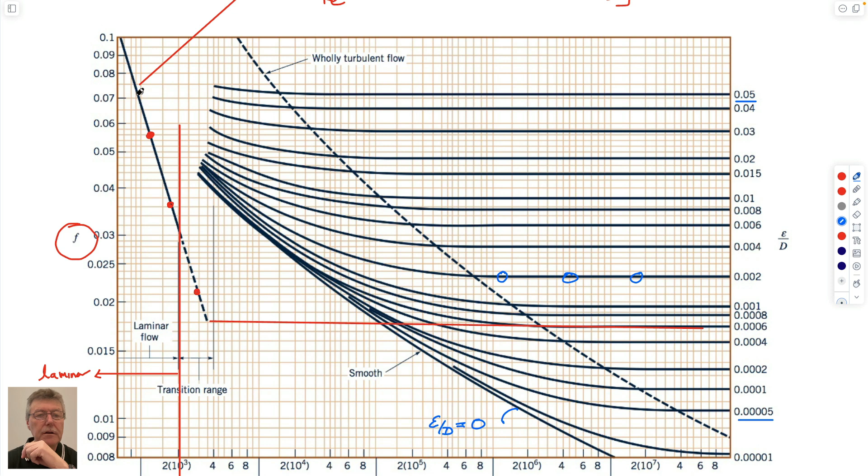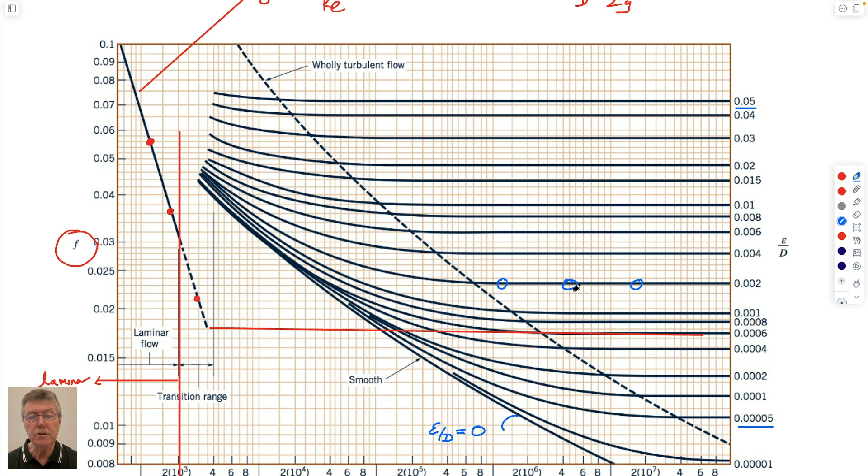So the fact that in the laminar regime, the friction factor is inversely proportional to Reynolds number, which includes velocity, and in the turbulent regime, the friction factor is not a function of Reynolds number, which includes velocity, means we might end up with different ways of solving it.

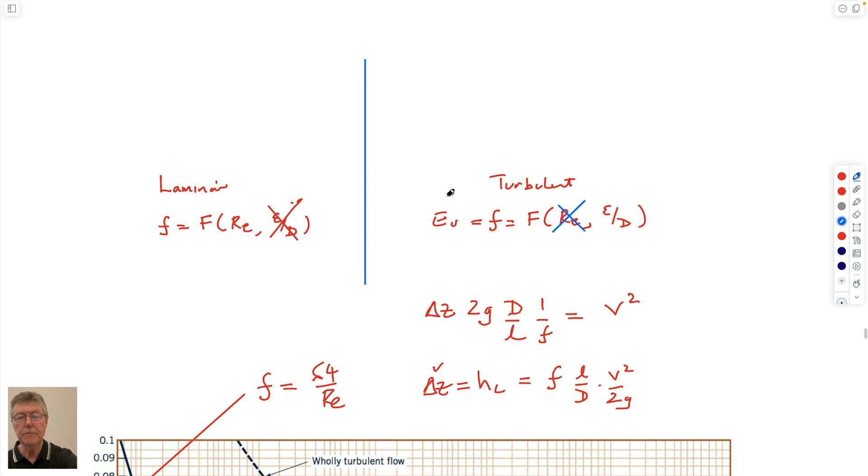I started drawing it below, but I've got more space here. So I said before that if you rearrange this expression, I'm going to write it as this. So if we want to get the velocity squared, in this regime we have a measurement of the head drop between upstream and downstream. We know what planet we're on. We have the length and diameter of our pipe, and we have 1 over friction factor.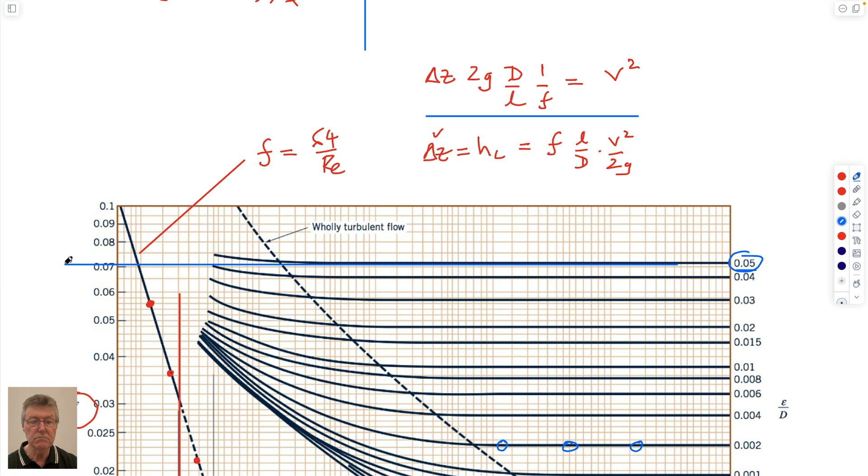If we know the roughness of our pipe, say, then we know that the friction factor is going to be equal to 0.072. And so if we want to get the velocity, we just square root this.

And immediately we have the velocity. So if we know the head drop, we know gravity, we know the pipe configuration, we know its roughness, we have this. We also have to solve the same equation if we have laminar flow. But if we have laminar flow, it'll look like this, if I just write it out.

Same equation, 2g d over L. But now it's 1 over friction factor, and we've said that the friction factor is this. And so if you include this, we would get 1 over friction factor is just 1 over this, so this is Reynolds number over 64. And that's a bit of a problem because Reynolds number includes a velocity term, right? So if we write it out with that included, we get 2g d over L, 1 over 64.

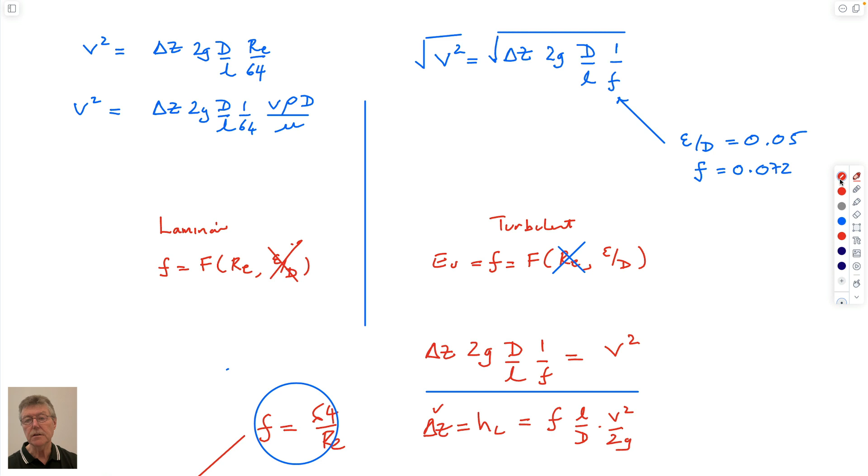And Reynolds number is a velocity, density, a characteristic dimension, and a viscosity. And so it's still equal to v squared, but now we lose one of our velocities. And so we cancel this out, we cancel this out, and so we just have now that the velocity is equal to the remaining terms. And so that's the essence of pipe flow, I think. And it would be density, diameter, and viscosity. So it would be diameter squared, right, in this. And that's basically it. So that's the kind of the trick, I guess, for pipe flow. It's really just a recipe.

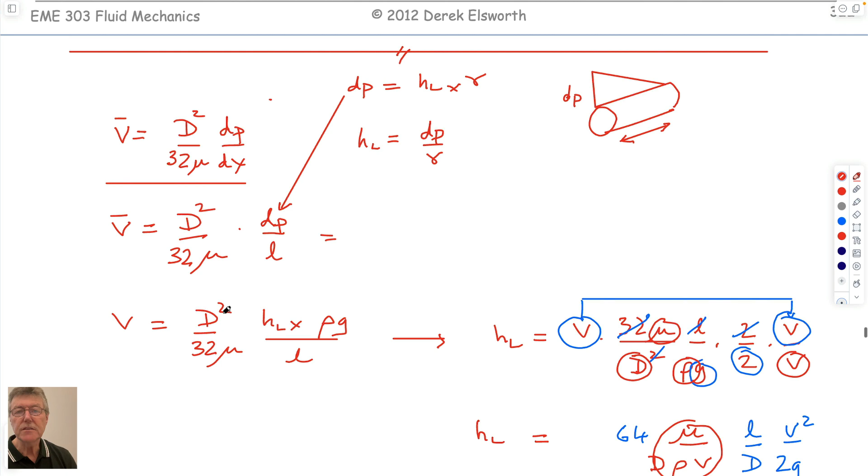So I guess all we've done today is we've kind of said that dimensional analysis is a pretty powerful thing, because we can figure out what the dimensionless groups of things are, so we can efficiently do experiments, not just in fluid mechanics, but in all of your stuff on campus, any branch of engineering or science. And so we can guess exactly what the format of this behavior would be and show that the Reynolds number and Euler number are the two parameters that control behavior.

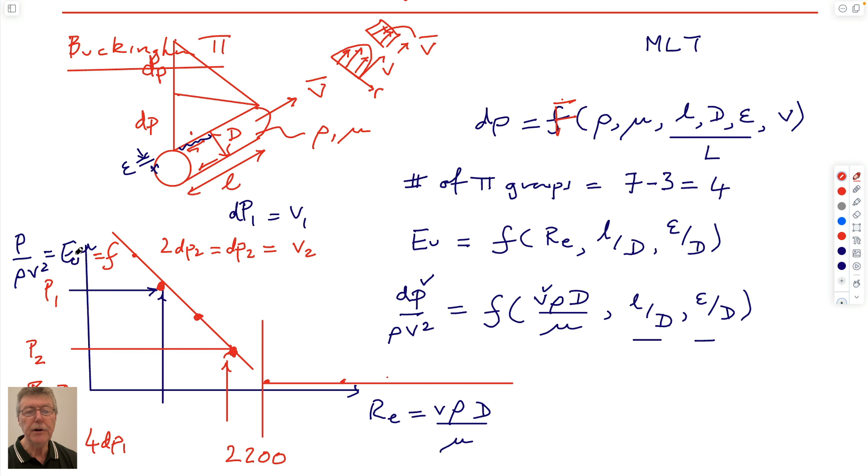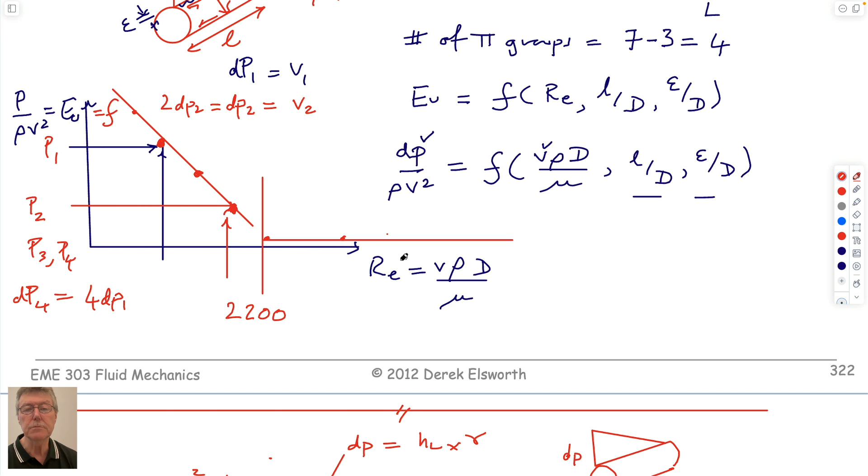Reynolds number makes sure that the flow regime is either with or without vortices, and is truthful in terms of the flow regime. And the Euler number just gives the forces that are applied to structures. So we have dimensional similitude in both of those parameters.

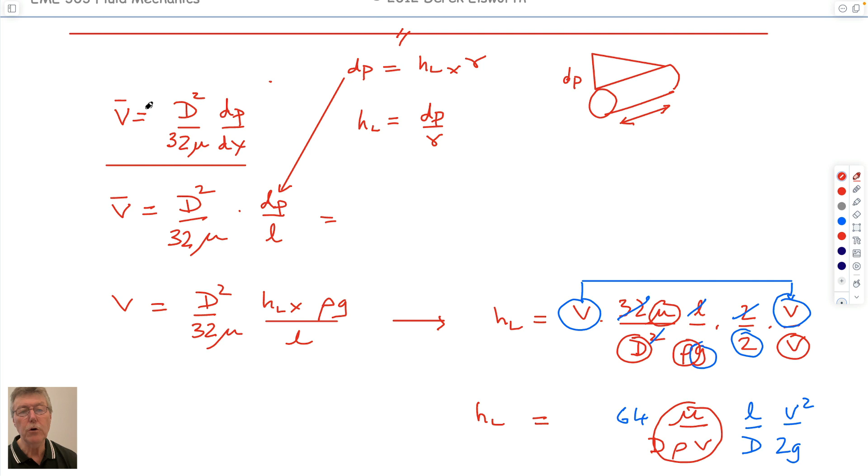If we know what the equations are for flow in a pipe, we can play around with those to actually define exactly what this friction factor is in the very simple laminar flow regime. And so we can draw that on a Moody chart to be able to show what that is. But if we want to do it for more complicated geometries with turbulent flow and with roughness, we can't get a very simple relationship. But we can run experiments to get this plot, which has been around for a long time.

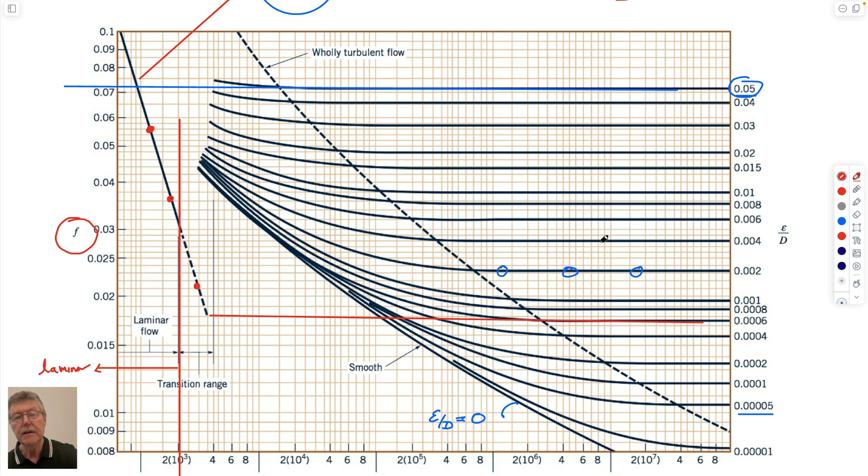And the essence of this plot is we either have laminar flow or turbulent, fully turbulent flow. And the dependencies of those flows are, for laminar flow, it depends as a function of Reynolds number. But for turbulent flow, it's independent of Reynolds number. You don't get something for nothing. It's now dependent on the relative roughness. And so you can solve for flow in a pipe in two different ways. The same head loss equation, the same friction factor, but a different dependency of the friction factor with the parameters of Reynolds number and relative roughness.

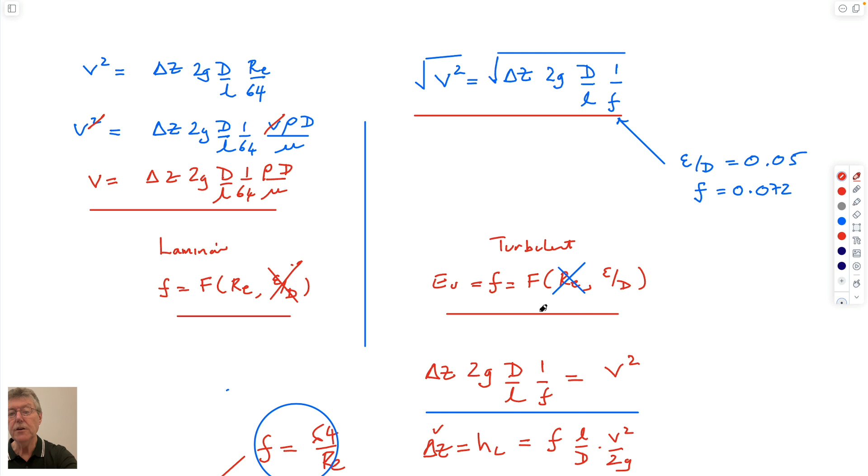And so as soon as you realize that, then you can define two different equations that give you solution for the flow velocity in the system. The other issue is we've still ignored minor losses, which we'll talk about next time. But we also realize that a problem in this is that the friction factor is a function of Reynolds number, and we might not know that Reynolds number unless we have a best guess of what the flow velocity is, which is what we're trying to find.

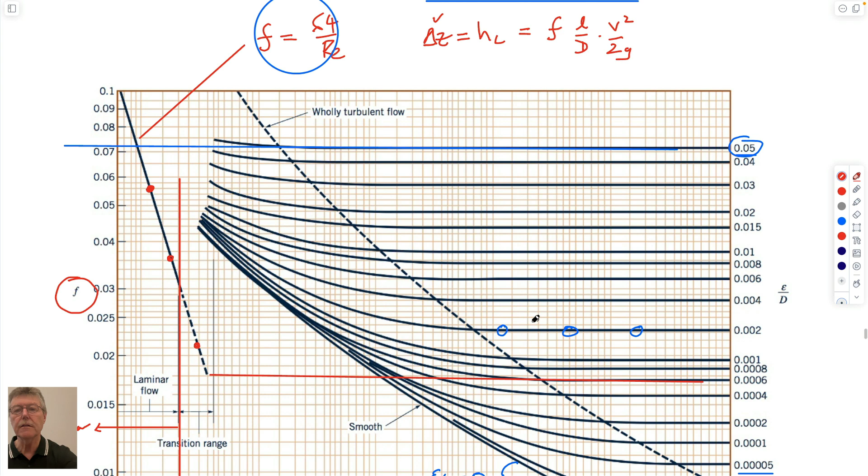And so it becomes a problem in guessing a velocity, calculating a Reynolds number for that velocity, getting a friction factor for that Reynolds number, and then checking whether that's the right friction factor to use in the equation when you recalculate the velocity. So it becomes an iterative process.

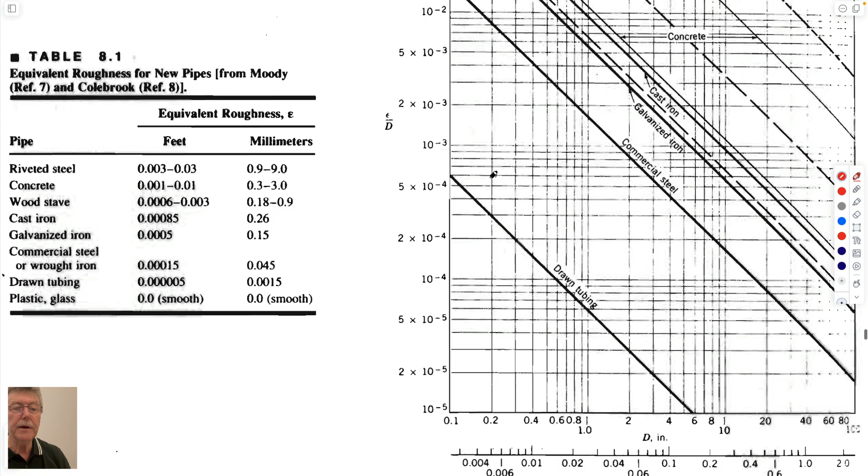So next time, I think what we'll talk about are the so-called, we'll talk about minor losses, but we'll talk about type 1, type 2, and type 3 questions.

So the easiest question is when you get a velocity prescribed. So you know velocity, you calculate Reynolds number, and you absolutely know what the friction factor is. Solve it in one go.

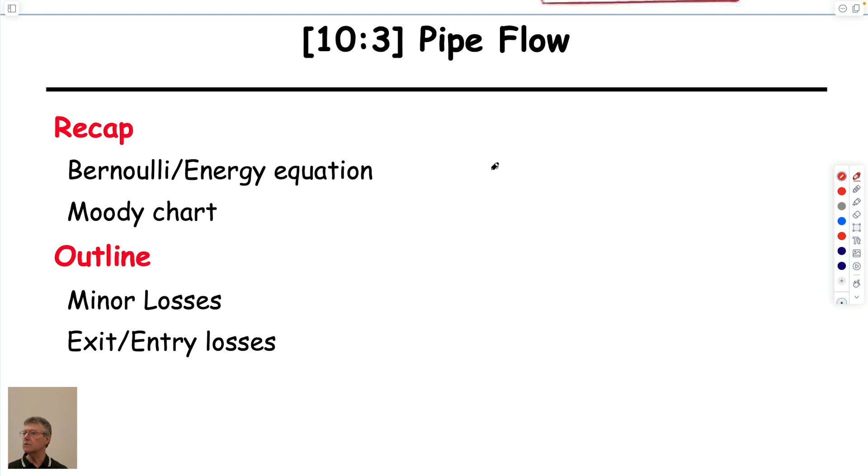If you know the pressure drop or the head drop, then you don't know the velocity, so you have to guess a velocity, calculate a Reynolds number, estimate a friction factor, check whether the velocity that you calculate is the same as the one you assumed. And so it has to be an iterative process. And we'll talk about that next time.

And we'll also talk about your favorite subject tomorrow.

Okay, great. So that's the essence of pipe flow. It's very formulaic. It's a recipe. We're just trying to understand a little bit about the constraints, and so we'll leave it at that.